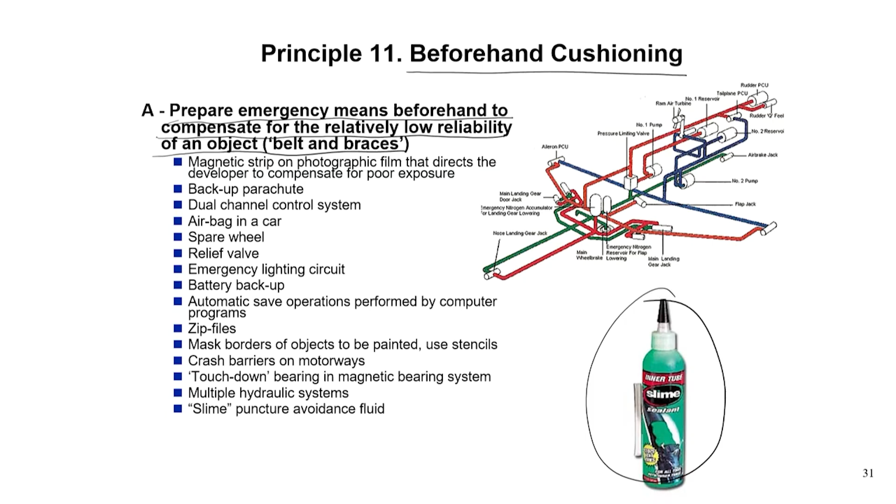Principle 12 is interesting, and it is a little bit more complex or less common sense than the other principles that I have discussed. Principle 12 is equipotentiality. What does equipotentiality mean? It means that you should always prefer to work in a surrounding where the least change of potential energy is required. Very simply, you would certainly not like to do some work on the ground floor, then jump up to the first floor, then go to the second floor. It is a much more energy consuming process.

Many of you might have seen how typically a car or a bus is maintained. They will either dig a small hole so that the person who is going to clean or inspect the chassis can go inside and see the car, or they will have a hydraulic jack system which will lift the entire thing up, and then they will do the cleaning and everything.

All these things are done in a way so that you can maintain the equipotentiality. So, if an object has to be raised or lowered, redesign the object's environment. So, the need to raise or lower is eliminated as far as possible, and or try to do it through the environment redesign.

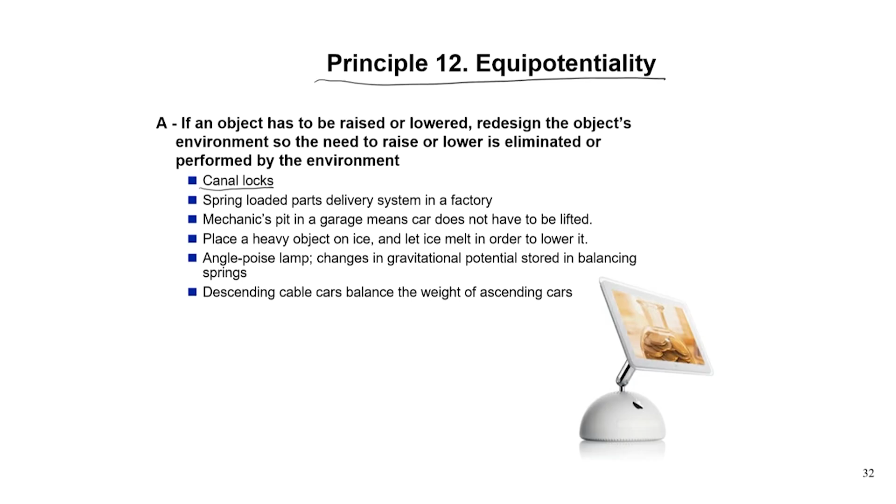Spring loaded parts delivery system in a factory. Mechanics pit I already told you. Place a heavy object on ice and let ice melt in order to lower it. Anglepoise lamp, changes in gravitational potential stored in balancing springs. Descending cable cars balance the weight of ascending cars, that is used both for elevators as well as for ropeways. So, these are all principles of equipotentiality.

Now, we come to a principle which is very much used in terms of solving a design problem when you cannot do it in a forward manner. We call this principle the principle of the other way round. And there are three connotations, of course. The first one is the most important one. What it means is invert the actions used to solve the problem.

Example, instead of cooling an object, heat it. To loosen stuck parts, we generally cool the inner part instead of heating the outer part. So, that way you can release it. Or vacuum casting, or test a pressure vessel by varying pressure outside rather than inside the vessel, or place nuts in a vacuum to get them out of their shells. So, everywhere you actually invert the problem.

Okay. So, let us say you have two systems to move relative to one another. If the traditional mechanism is to move system A, then you try to hold system A and move system B. So, that is inverting the action. Then make movable parts or the external environment fixed and fixed parts movable.

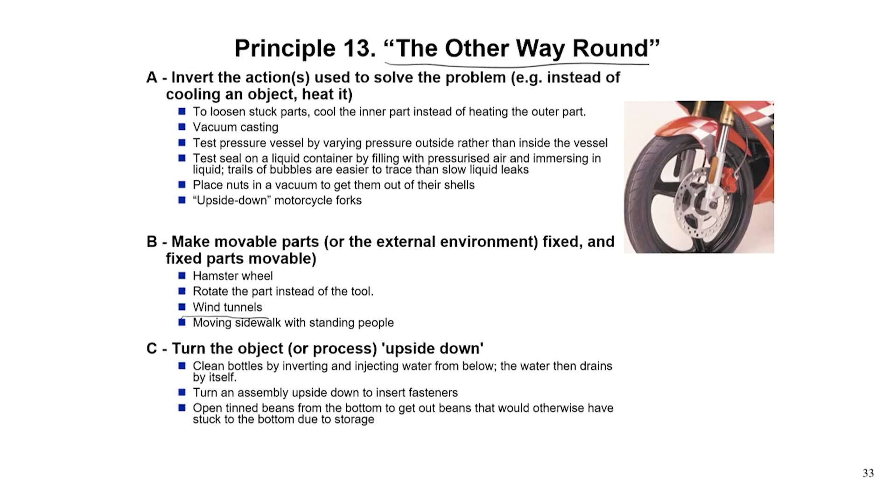Finally, another connotation is turn the object or the process upside down, like clean bottles by inverting and injecting water from below, then the water drains by itself. So, you do not have to spend extra energy for draining. Or turn an assembly upside down to insert the fasteners, or open tinned beans from the bottom to get out items that would otherwise have stuck to the bottom due to storage. This is something you will not see in too many applications, but it is a better idea to release the items from a packaged system. So, this is the other way round.

Now, let us go to the next principle, principle number 14. I have talked about this principle, if you remember, while discussing the stacking of bottles, cold drinks, etc. This principle is all about spheroidality or curvature. Spheroidality is a special type of curvature, but you can think of other curvatures like positive or negative curvature; it need not always be spheroidal, it can be parabolic, it can be hyperbolic. So, use of curvature is the key thing in this principle.

The first clause is, instead of using rectilinear parts, surfaces or forms, use curvilinear ones. Move from flat surfaces to spherical ones, from parts shaped as a cube or parallelepiped to ball shaped structures. For example, use arches and domes. For a very long time, since before Christ, if you see the discovery of arches, by the way, that has happened in our own country.

In the Indus Valley civilization, people used something which is called a corbelled arch: by placing the bricks one ahead of the other, they created the curved structure. So, something like this. This is the first phase of creating curvature in a construction, which later on people have been able to do with a nice curved parabolic kind of structure.

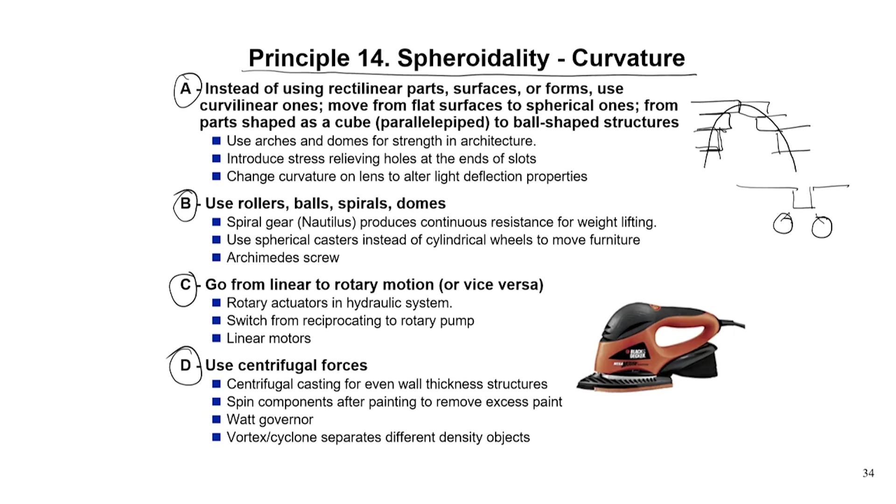And then use of centrifugal forces, which is also related to spheroidality or curvature, because centrifugal forces are generated by motion in a spherical or circular motion system. So, that is how principle 14 is used in many different cases.

Principle 15 talks about dynamics, and dynamics is a very vast principle. There are 4 different dynamics principles. Principle A in dynamics is allow or design the characteristics of an object, external environment or process to change to be optimal or to find an optimal operating condition. That means unless you allow a certain bit of dynamics in the system, you won't be able to set the system in its optimal location.

A very simple example is a locking mechanism. Suppose you have a locking system and a sort of ball system which is to be locked. If you keep this little dynamics, it will slide and come to this part, and you can have a special slot here so that it goes inside. That way you are using the system dynamics to lock 2 systems. This is very much used in turn indicator mechanisms of automobiles.

Similarly, dynamics is used in shape memory alloys or polymers, racing car suspensions, adjustability; a telescopic curtain rail allows one size fits all. These are all allowing certain dynamics to happen. So, this is allowing the characteristics of an object. Secondly, divide an object into parts capable of movement relative to each other, for example a folding chair, so you can deploy it as and when required. Brush seals. There are many such examples of dividing objects into parts.

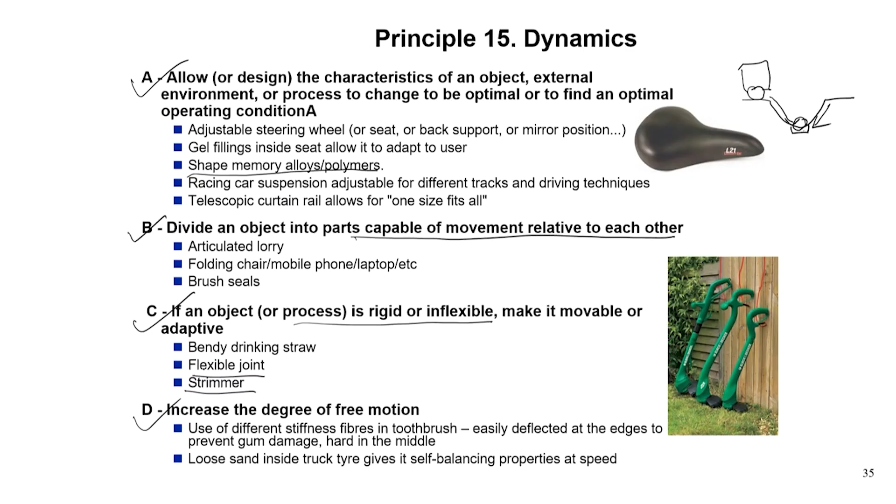Now, I come to the next one, principle 16, which talks about partial or excessive actions. Many times we say that an action will be over once I do 100% of it, but that should not be the case. That may take an enormous amount of time. Rather, we should go for 90% or 110%, and then for the last part allow some special way of doing it, so that it becomes a much more accurate yet faster way of doing something.

So, if 100% of an object is hard to achieve using a given solution, then by using slightly less or slightly more of the same method, you may solve the problem much faster. Okay? One example I tell you. See, if I draw a circle on the screen, it may not be a perfect circle, does not matter. I am just trying to tell you about the idea. Let us say I have done this.

Now, in your eyes it is looking like a circle or a curve, but actually what is happening here is that there are very small pixels that are drawing this entire system in this kind of a way. That means it is neither drawing a full circle, nor is it drawing a complete straight line, but it is a kind of slightly more or slightly less of the area type of principle. So, this is one of the ways the digital systems in computers operate.

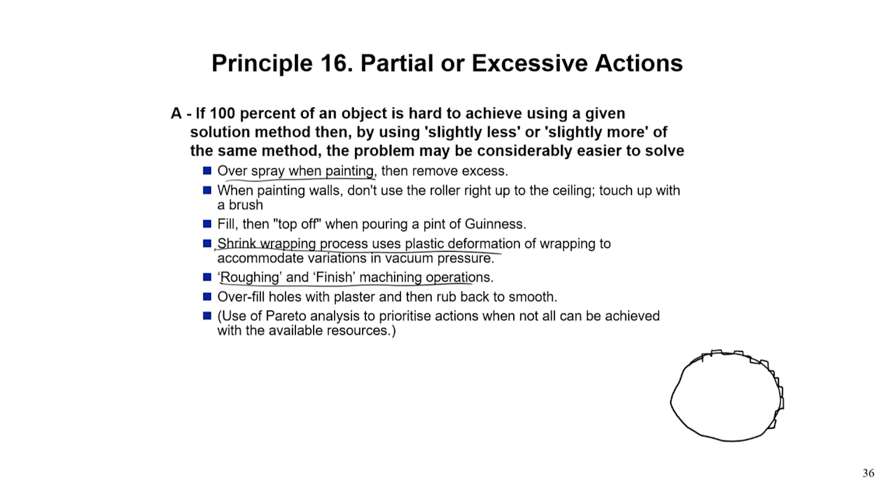So, similar things you would see people adopt when they overspray a painting, because it is much easier to do it and keep some mask. And there are other things also, like the shrink wrapping process uses plastic deformation. Roughing and finishing in machining operations: you make a particular cut first and then you finish it up. So, like that, the partial or excessive action is taken care of.

Principle 17 is interesting. Principle 17 focuses on adding further dimension, and that is extremely useful in terms of making a system compact. That is why there are so many examples of it. The first group of examples is that if an object contains or moves in a straight line, consider use of dimensions or movement outside the line, so that you are adding another dimension. For example, you coil a telephone cable, so that it will remain smaller, compact, but whenever needed a person can extend it to a much larger distance. Or curved bristles on a brush, you are adding an extra dimension.

If an object contains or moves in a plane, consider use of dimension or movement outside the current plane. That means add an extra plane. A spiral staircase, which uses less floor area. Introduction of down and up slopes between stations on a railway reduces train acceleration and deceleration power requirements. Or a conical instead of plain flange joint.

Use a multi-story arrangement of objects instead of a single story arrangement, like a cassette with 6 CDs to increase the music time and variety. A multi-story office itself, a multi-story block or something. That means instead of growing horizontally, you are adding the third dimension. Tilt or reorient the object, lay it on its side, like a dumping truck. Use another side of a given area. Mount computer chip components on both sides of a silicon card.

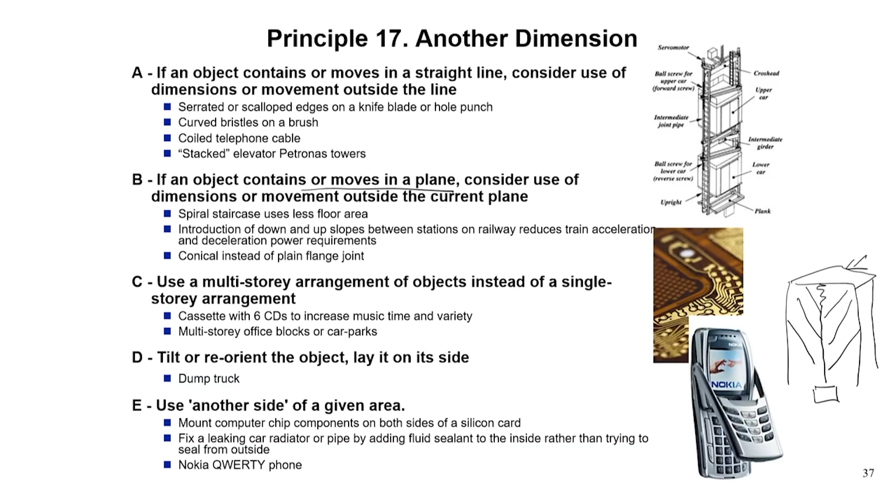We have used this in a very interesting example that I showed you on the first or second day itself. As I told you, we had to develop a kind of linear actuator, right? And if you remember, it had a bipennate actuation system like this, and there is some spring here and it is supposed to pull some load here. What we figured out is that this is a plane, but the other side of the plane is not utilized. So, we started adding similar bipennate actuators on the back side as well. That way we can increase the pulling power of the system, we can actually make it double.

Now, I come to principle 18, which is mechanical vibration. In this case, we would like to use vibration in order to do some work, like cause an object to oscillate or vibrate. All this, the electric carving knife is based on the principle of vibration, or a hammer drill, or vibration used during the sieving operation. So, create an oscillation or vibration. Suppose the entire thing is already vibrating, you increase its frequency even up to the ultrasonic. Ultrasonic cleaning is one example of it, or non-destructive crack detection using ultrasonics.

So, increase the frequency. Use an object's resonant frequency in order to do some work, like destroying a gallstone or a kidney stone, or easing bottle cleaning by a pulsing washing action at resonant frequency. Then use piezoelectric vibrators instead of mechanical ones. That would become an electromechanical system, because piezoelectric materials are smart materials, for which an electric field change can create a mechanical change, like a change of displacement or change of force.

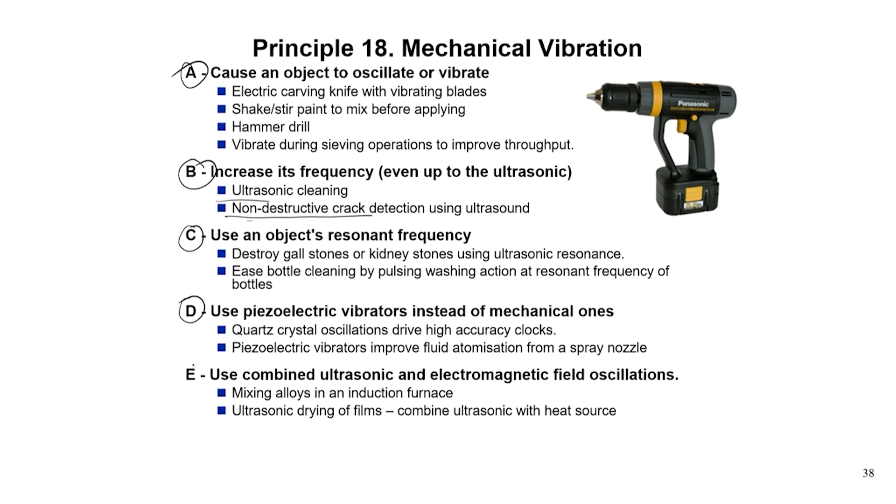So, using that you can actually create a vibration and maintain it electrically. Use combined ultrasonic and electromagnetic field oscillation, two different types of stimulus together to generate vibration, like mixing alloys in an induction furnace or ultrasonic drying of films. So, these are all mechanical vibration principles.

I now come to principle 19, which is the periodic action principle. You may think it is almost the same as vibration, but periodic action is not exactly like vibration. Okay? So, periodic action in that sense may mean some signal which is not vibration, but at least it is periodic in nature. Like, let us say that a vibration signal can be something like this, but loosely speaking a periodic signal is something like this. So, there is an element of periodicity or something like this. This is called a sawtooth signal. So, use of such periodic signal.

So, now the principle here is that instead of continuous action, use periodic or pulsating action, like hitting something repeatedly with a hammer. If you have to drive a nail, instead of putting all the force in one shot, if you use a small force, but do it continuously, that way you would need less force, because that continuous periodic excitation will actually create certain crack generation, and then the structure that you are trying to insert will go in a much easier way. Exactly the same strategy people use for pile drivers and hammer drills.

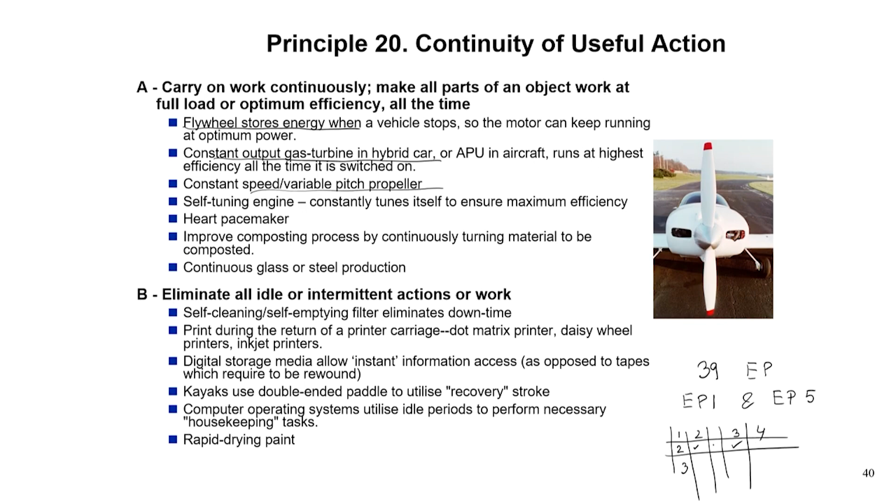So, I have talked about up to 20 principles in this lecture, and in the next few lectures we will talk about some more TRIZ principles, and then we will talk about how to utilize these TRIZ principles. If you remember, we had these 39 engineering parameters, right. So, 39 EPs, and I told you that any contradiction, let us say between engineering parameter 1 and engineering parameter 5, you will see in a matrix form, in which we will have on this side all the technical parameters, and again on this side the technical parameters, and then in this matrix we will talk about what are the principles that are utilized for all of them, and that way we will see how all the principles we are now going through are used in solving different technical contradictions.